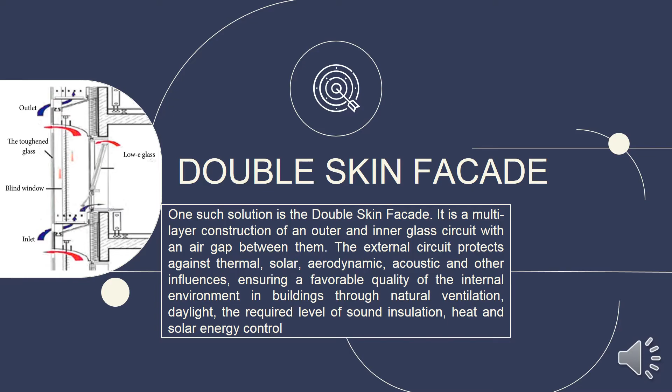The double-skin facade is the subject of this study. Based on the above, the purpose is to substantiate and prove the advantages of this design in relation to cold climatic regions, and to identify the most optimal design, including the width of the buffer zone.

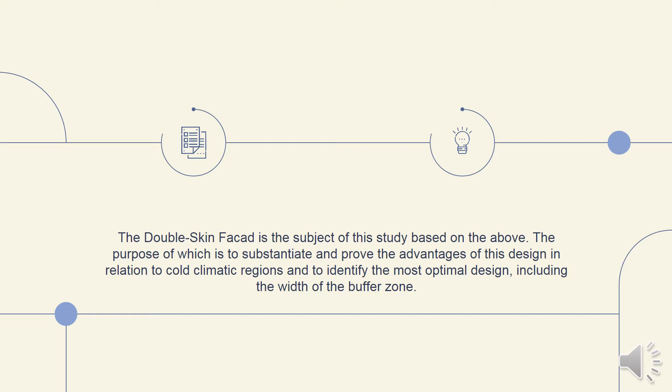Methods. For the study of two-dimensional temperature fields of the variant design of the structure of a double glass facade, the base region chosen was the Arctic city of Murmansk. Murmansk is the largest city in the world beyond the Arctic Circle, which is a major maritime transport hub and fishing center of Russia.

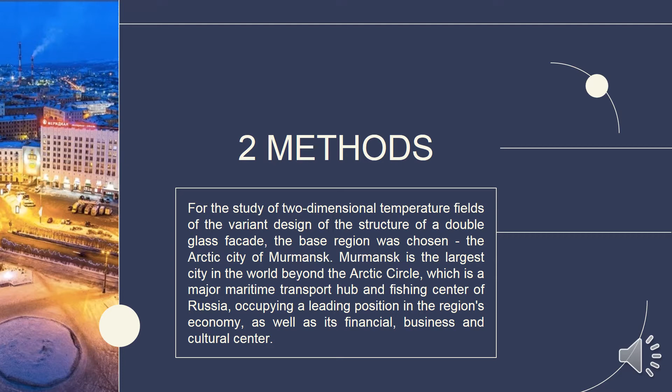Murmansk occupies a leading position in the region's economy, as well as being its financial, business and cultural center. Within the framework of this study, a thermal engineering calculation of two-dimensional temperature fields was carried out according to the presented design options, shown in Figure 1.

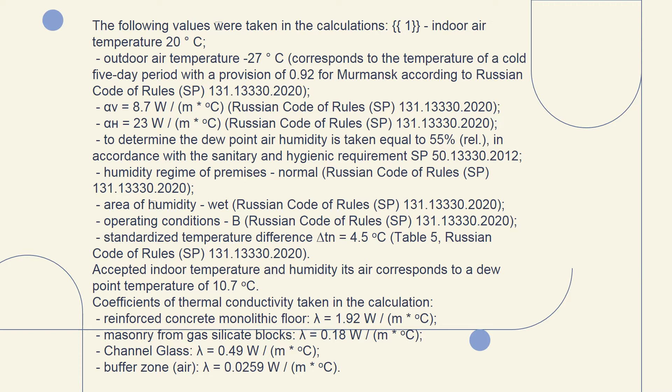Today, the separation of the bearing and heat insulating functions of building materials in building structures is the basis of the concept of a heat-efficient building and increasing the level of its thermal protection.

The normalized value of the reduced resistance to heat transfer of the enclosing structure, R_0 norm, in M2*C/W, should be determined by the formula.

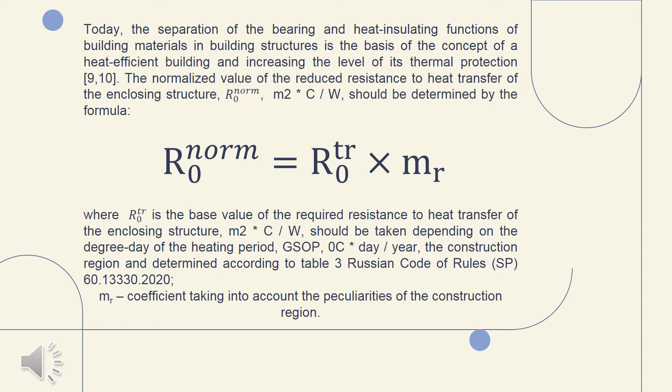Within the framework of these studies, the main goal was to justify the use of a double facade design, identifying the most optimal width of the buffer zone, taking into account the fulfillment of sanitary and hygienic requirements per Clause 5.7 of Russian Code of Rules, SP 50.13330.2020, which regulates that the surface temperature should be higher than the dew point under design conditions.

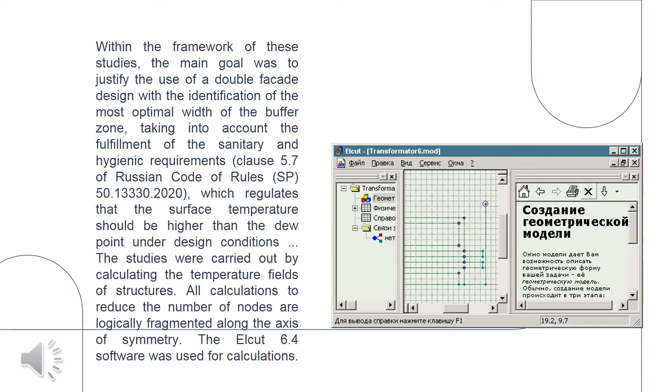The studies were carried out by calculating the temperature fields of structures. All calculations, to reduce the number of nodes, are logically fragmented along the axis of symmetry. The Elcut 6.4 software was used for calculations.

2.1 Heat engineering calculation of option 1: gas silicate masonry, 400 mm. Figure 2 shows the result of the heat engineering calculation of option 1, gas silicate masonry, with the image of isolines and heat flow.

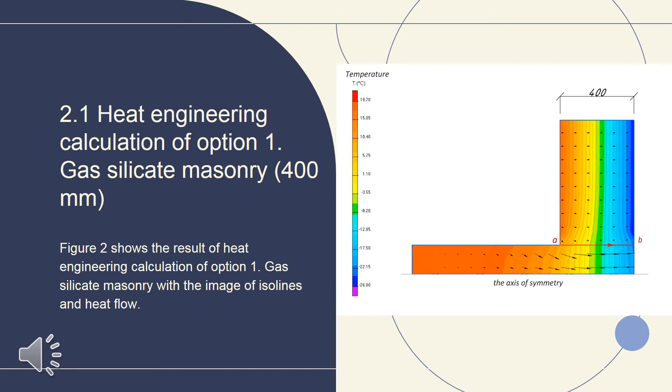These temperature fields, Figures 2 and 3, correspond to the numerical results in Table 1. In this table and the following, these designations are used: F, heat flux over two internal surfaces, in watts; delta T, temperature difference between two internal surfaces, in degrees Celsius; Ts, average temperature of two internal surfaces, in degrees Celsius; Tf, surface temperature in the corner between the floor and the wall, in degrees Celsius.

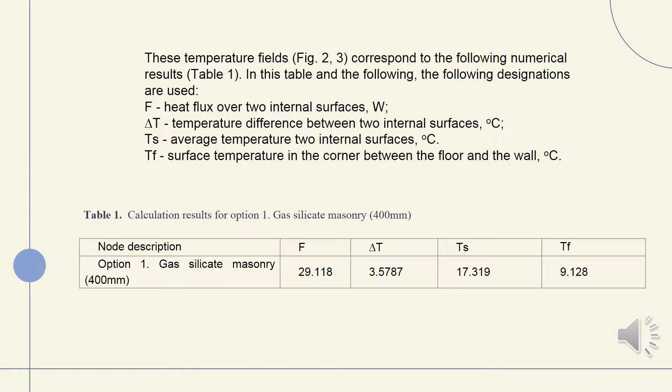2.2 Thermal engineering calculation, option 2: double facade, buffer zone width 200 mm. Figure 4 shows the result of the heat engineering calculation of option 2, a double facade with buffer zone width of 200 mm.

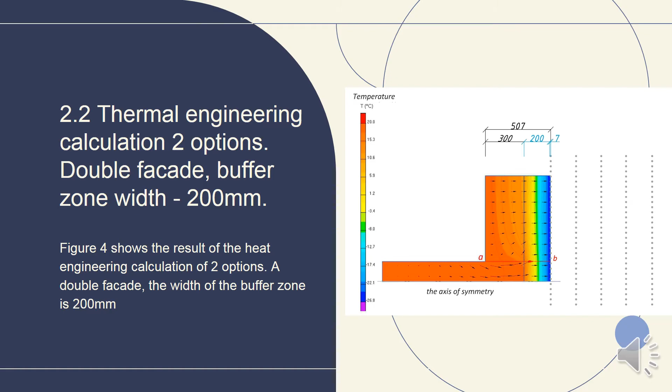Table 2. Calculation results for option 2: double facade, buffer zone width 200 mm.

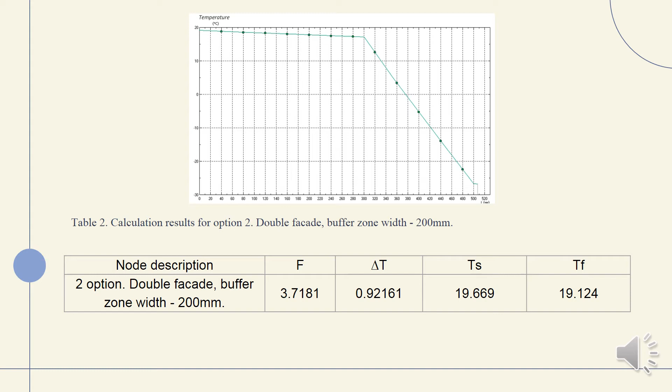2.3 Heat engineering calculation, 3 options: double facade, buffer zone width 400 mm. Figure 6 shows the result of the heat engineering calculation of 3 options, double facade, with buffer zone width of 400 mm. Table 3 shows the calculation results for option 3, double facade, buffer zone width 400 mm.

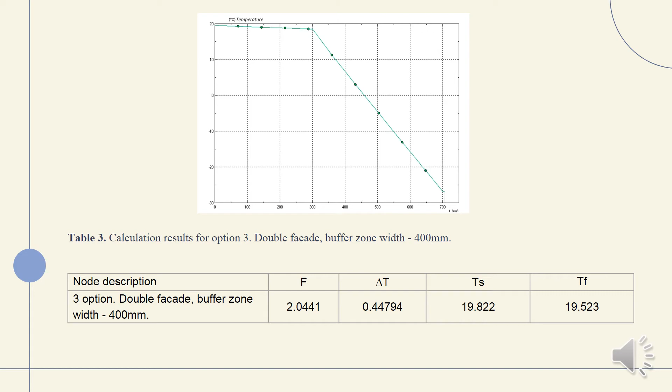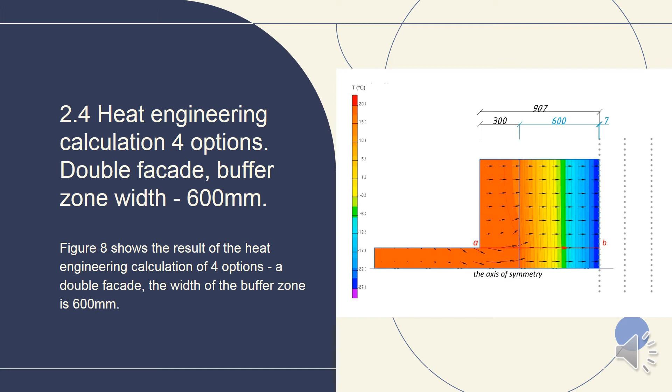2.4 Heat engineering calculation, 4 options: double facade, buffer zone width 600 mm. Figure 8 shows the result of the heat engineering calculation of 4 options, a double facade with buffer zone width of 600 mm. Table 4 shows the calculation results for option 4, double facade, buffer zone width 600 mm.

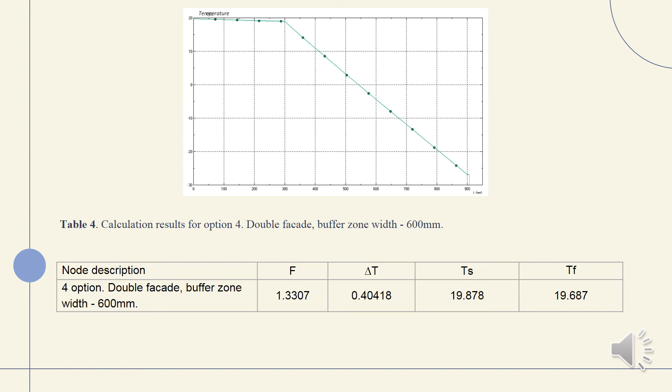2.5 Heat engineering calculation of the 5th option: double facade, buffer zone width 800 mm. Figure 10 shows the result of the heat engineering calculation of the 5th option, a double facade with buffer zone width of 800 mm. Table 5 shows the calculation results for option 5, double facade, buffer zone width 800 mm.

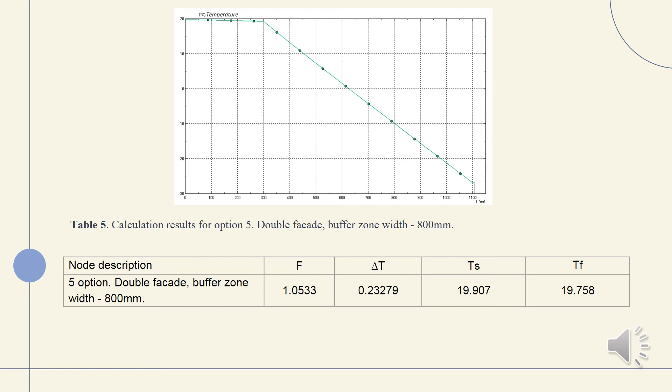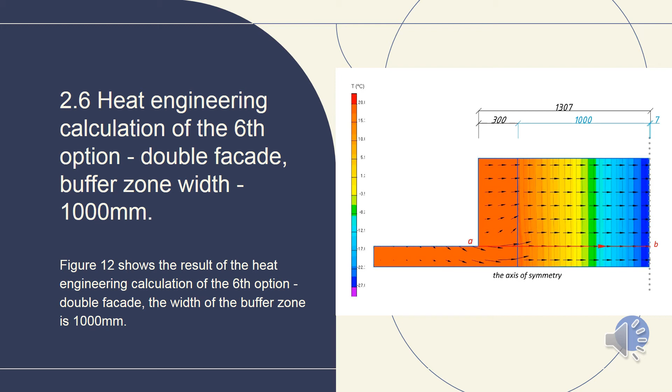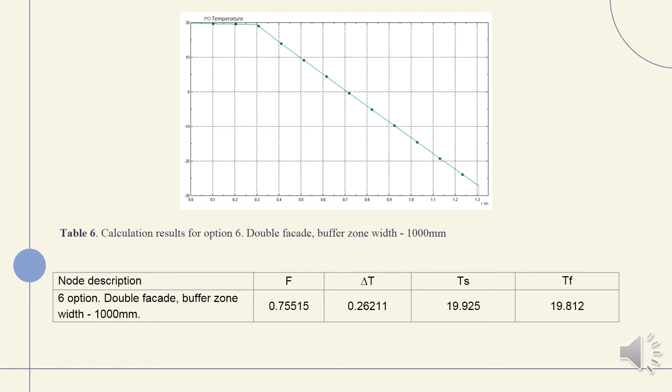2.6 Heat engineering calculation of the 6th option, double facade, buffer zone width 1000 mm. Figure 12 shows the result of the heat engineering calculation of the 6th option, double facade, with buffer zone width of 1000 mm. Table 6 shows the calculation results for option 6, double facade, buffer zone width 1000 mm.

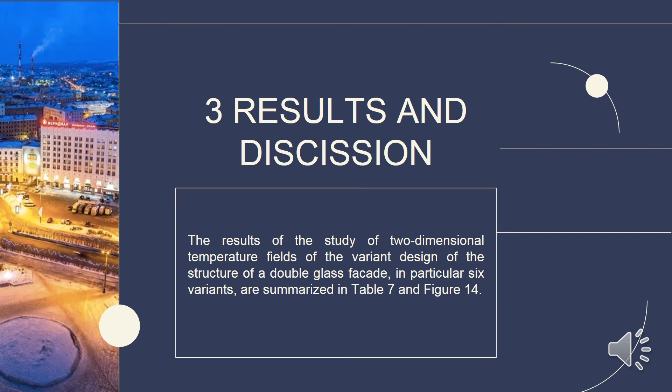Results and discussion. The results of the study of two-dimensional temperature fields of the variant designs of the structure of a double glass facade, in particular 6 variants, are summarized in Table 7 and Figure 14. Table 7 provides a summary of the results of the 6 options.

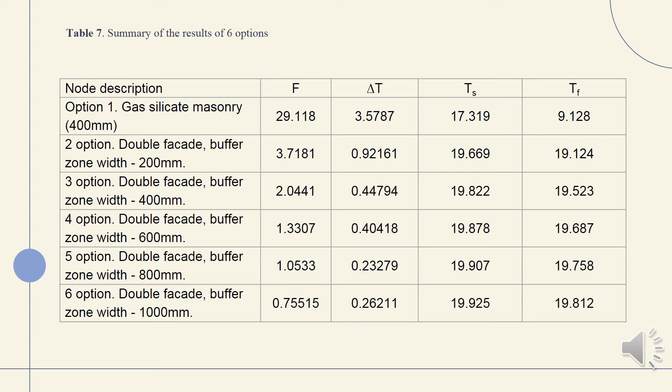From the data obtained, it can be observed that with an increase in the buffer zone from 200 mm to 1000 mm, the average temperature of the two inner surfaces, Ts, increases systemically. Accordingly, with an increase in the width of the buffer zone, the temperature difference between the two inner surfaces, delta T, decreases. The most optimal widths for the buffer zone can be taken as 200 mm and 600 mm if it is necessary to provide a passage in the buffer zone.

For the variant with a technical passage, a cantilever base for the passage should be provided. In addition, ventilation openings in it should be designed.

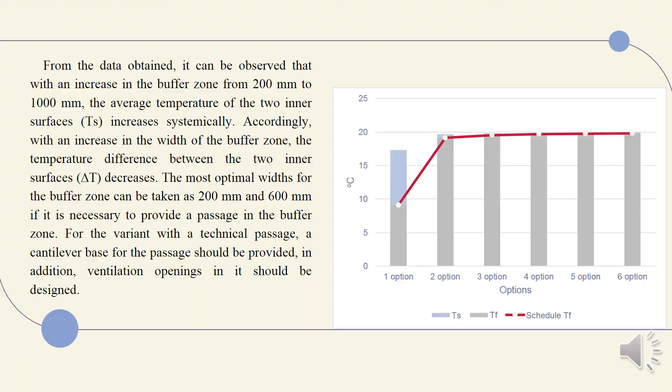Conclusions. 1. The use of a double facade structure in a cold region is justified. The fulfillment of the sanitary and hygienic requirements, Clause 5.7 of Russian Code of Rules, SP 50.13330.2020, is taken into account, which regulates that the surface temperature must be above the dew point under design conditions.

2. With an increase in the buffer zone, the average temperature of the two inner surfaces increases systemically, and, accordingly, the difference in their temperatures decreases.

3. The most optimal widths for the double-skin facade buffer zone in Murmansk can be assumed to be 200 mm and 600 mm if it is necessary to provide a passage in the buffer zone. For the variant with a technical passage, a cantilever base for the passage should be used. In addition, design ventilation openings in it.

4. The glass channel as part of the double-skin facade offers a stunning alternative to traditional opaque building walls and flat architectural glass, creating virtually seamless facade surfaces.

5. The use of the double-skin facade for architectural solutions in cold climatic regions is justified not only as a self-illuminated effect, but also demonstrates sufficient energy efficiency due to the selection of the optimal width of the buffer zone.